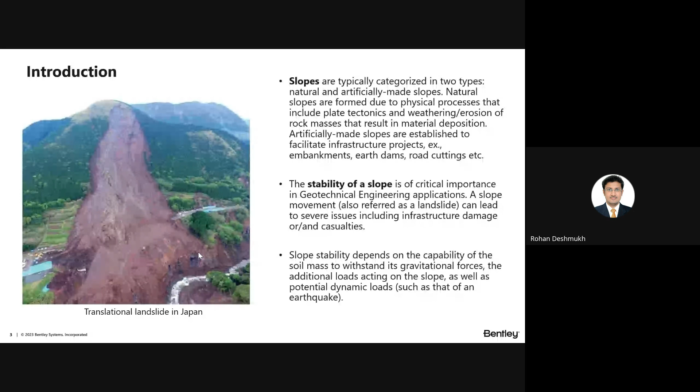Slope stability depends upon the capability of our slopes to withstand gravitational force, meaning its self-weight, the self-weight of the soil or rock material. In addition, sometimes external loads are also there at the top of slopes, maybe from some construction, which the slope must withstand. And in addition to that, sometimes earthquake or some dynamic load also comes into the picture. So the slope must withstand all these different forces: gravitational, external forces, and earthquake or dynamic loads. This is all about the introduction about slopes.

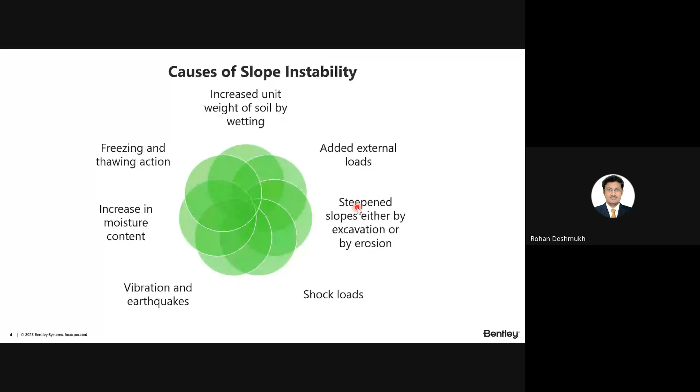Now, what are the different reasons or causes which lead to slope instability or slope failure? The very first and most common one is the increase in weight of the soil because of saturation, because of wetting - that is the main predominant reason behind many slope instabilities. Added external loads at the top of slopes may also cause slope instability. Sometimes steepening of slopes, either by excavation activity or because of erosion, is also one of the reasons. Shock loads, vibrations, and earthquakes - these dynamic loads also sometimes trigger slope instability. Increase in moisture content, and in some regions, freezing and thawing action is also responsible for causing slope instability.

Now I'll show you some typical modes of failure and types of slope failure, as suggested by Varnes in 1978. The very first type of slope failure, which happens mainly with rocky material, is falls, where you can observe simply downward movement of rocky material. You can see the rock material get detached from its parent rock, and in the case of falls, that movement is in a linear pattern. You can see this rock fall in figure 1A, and this is an actual example from Spain, that is the rock fall.

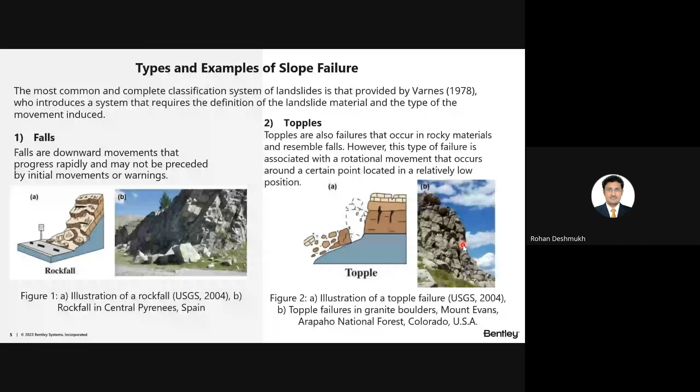Now coming to the second mode of failure, that is topples. It is similar to falls - our rocks get detached from their parent rock, but along with the linear motion, sometimes rotational motion is also there for the detached rock. You can see this is an example from Colorado, USA. That is about the topple kind of failure, where rocky material gets detached from its parent rock, and that detached material, along with translation motion, also has rotational motion.

Now regarding the slide, this is another mode of failure. It is mainly because when the applied shear stress is more than the shear strength of our soil or rock, and this leads to a shear failure.

This is an example from Japan, and the reason behind it is seismic activity; earthquake is responsible for this kind of slide or landslide failure. This is the case from the year 2016.

Further, you can see another mode of failure, the lateral spread, mainly because of liquefaction, and it happens in the case of saturated soils. Because of shaking or the earthquake, the shear strength gets completely lost for a saturated soil, and this kind of thing happens. You can see this lateral spread happened in Pakistan, causing complete damage to this road or highway.

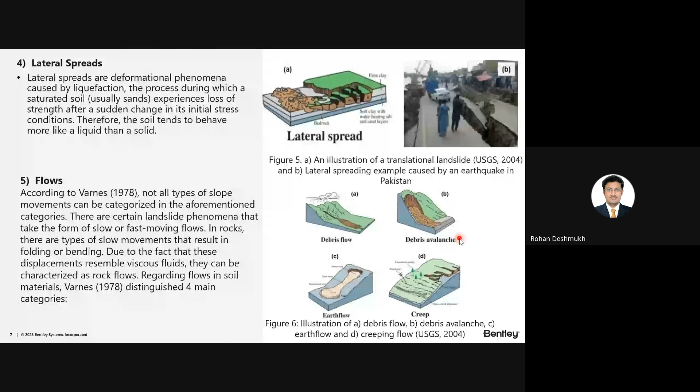Another mode of failure is the flows. The failures which we cannot categorize in the earlier four categories, we categorize them in the flow category. So what will the flow kind of failure be? Simply the soil material or rock material flows along an inclined path. You can see the debris flows or debris avalanche, these are a few examples of flow kind of failure.

Now we just discussed the different modes of failure, and now coming to India: there are a lot of examples where slopes get failed because of several reasons. These are a few news cutouts I have taken about the mishappenings or landslides which happened throughout India. This is the case from Kerala, from the year 2022, where this road completely got blocked because of this landslide.

This is another example from Kerala itself. You can see massive translational kind of sliding happening along this region; the whole soil material is completely washed out.

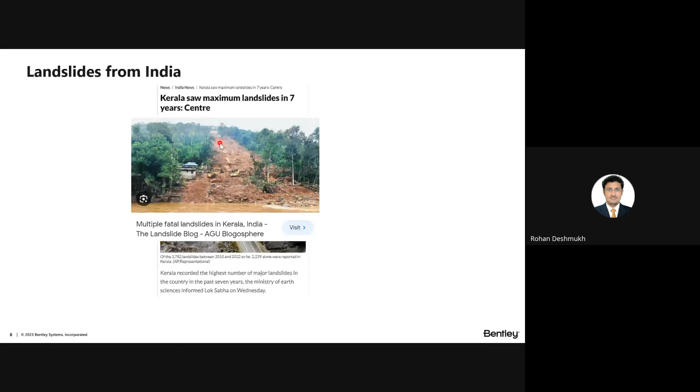This is another from the northern part of India, where almost 46 got killed because of this mishappening, this landslide. This is another photograph from the Himalayan region, over 50 killed again, and rain is the factor which triggered this kind of failure.

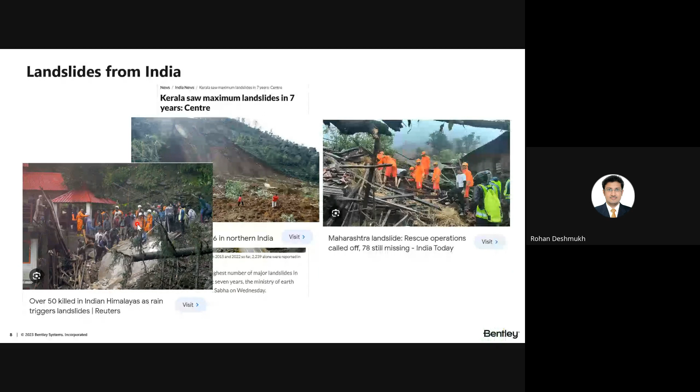This is another case from Maharashtra. This is another photograph from landslide damages; you can see that a portion of this road is completely washed out.

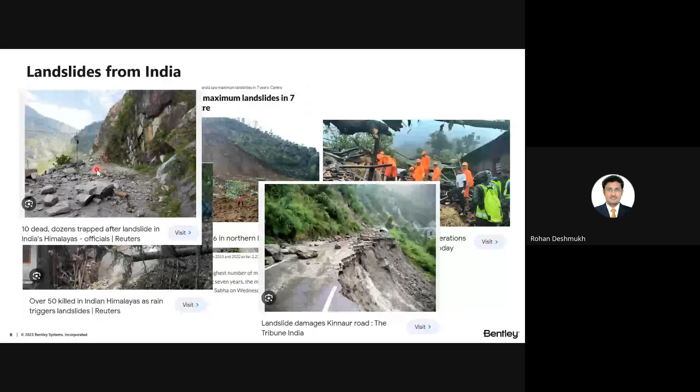This is another example, where you can see rock particles get detached from the parent rock and are now on the road surface. This is again an example from the Himalaya.

This is another case study, another news item from Maharashtra. You can see 12 killed in the landslide after heavy rain, and I guess this is the case from the Pune region.

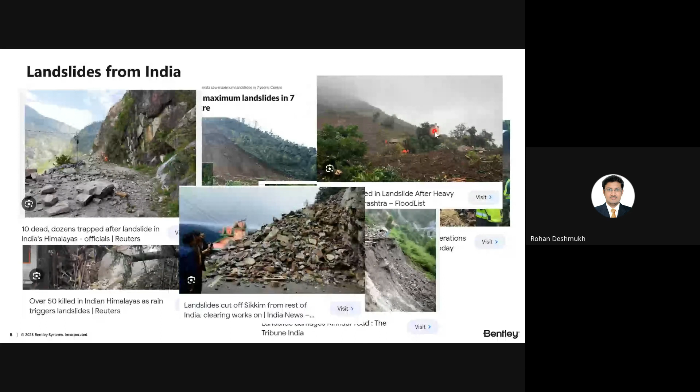This is the example from Sikkim. So many of this kind of landslide happen every year in India, not only in the Himalaya region, but in other parts of the country as well, like Kerala and Maharashtra.

So is there any guideline available? Are there any suggestive measures to avoid this kind of mishappening?

Recently, the Central Electricity Authority of India published one guideline, and in that they have clearly mentioned what we need to do to avoid this kind of mishappening. But this guideline is applicable only for hydropower projects, since it is given by the Central Electricity Authority of India. In their guideline, I just highlighted the portion which is important for this session; that is what they mention in this guideline.

Project authority should carry out numerical model studies of vulnerable slopes, meaning identifying where the critical slopes are, using either a limit equilibrium approach, or the finite element method, or the finite difference method, to find out the factor of safety for those vulnerable or critical slopes.

Excuse me sir, the screen is not visible. There are multiple screens that have been shared.

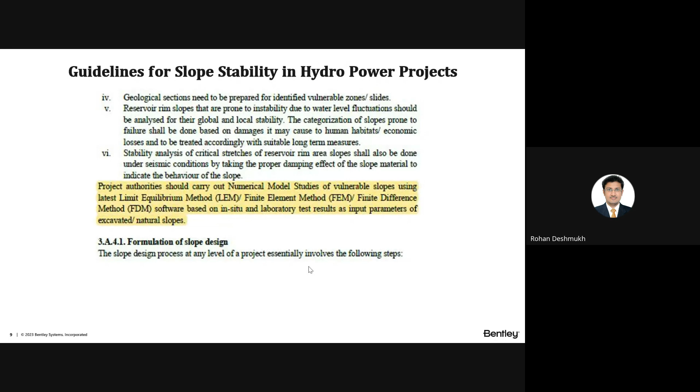These guidelines clearly indicate the role of software tools or different numerical techniques to find out the factor of safety for critical slopes. Of course, the input data is again important in this case. You need to carry out in-situ tests and some laboratory tests to give the proper input data.

So that we can get the appropriate factor of safety for our critical slopes. Now, coming to the main point of discussion, that is the methods of slope stability analysis. I distinguish the slope stability analysis methods into two: one is the limit equilibrium approach, and the second is the numerical method of analysis.

In the numerical method of analysis, there is a continuum modeling technique, discontinuum, and hybrid coupled modeling. In the limit equilibrium approach, which is very common for factor of safety determination for slopes, there are a lot of methods: the Swedish circle method, ordinary method of slices, modified Bishop's method, Lorimer's method, Spencer's method, and the Sarma method.

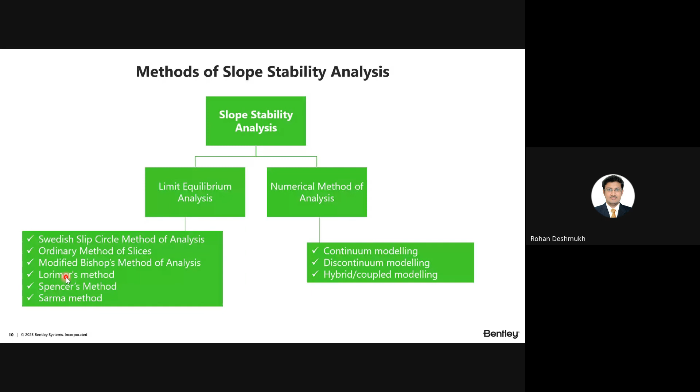Now I will see the limitations and advantages of each and every method. Coming to the limit equilibrium analysis, as I mentioned, it is the most common and widely used slope stability method. But there are a few assumptions behind this limit equilibrium analysis. Let's try to understand those.

This type of analysis is based on the assumption that the slope is on the verge of failure and that the forces acting on the potential failure surface are in equilibrium. This is the very fundamental assumption behind this limit equilibrium analysis.

There are a lot of different methods of slices, like the Fellenius method, Bishop, Spencer, and Morgenstern-Price methods, in which we divide our slopes into either vertical slices or sometimes horizontal slices. What we are doing in all these methods is trying to find out the horizontal forces, vertical forces, even the inter-slice forces for each and every slice, and finally we try to find out the factor of safety based on some equation.

We'll try to cover that equation in the upcoming slides. Another aspect of limit equilibrium analysis is that, of course, it is very fast. It is compatible with many geotechnical software tools and relatively very simple.

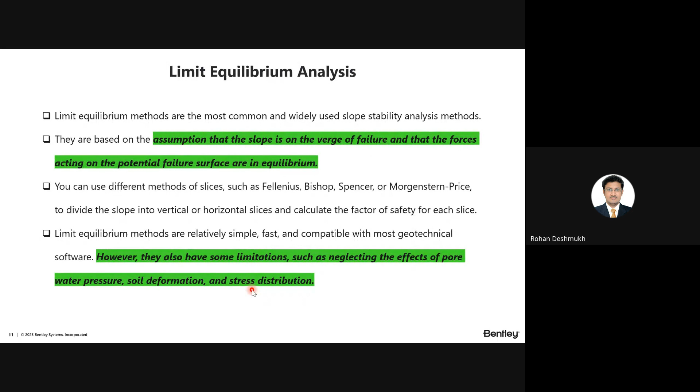But sometimes when we go with limit equilibrium analysis, it neglects the effect of pore water pressure - I'm saying in some cases, or with some software tools. It also neglects the soil deformation analysis and the stress distribution. These things get neglected in many geotechnical software tools when we use the limit equilibrium approach.

Now let's try to understand the different methods, the assumptions behind them, the equations that we use, and the probable slip surface we assume for every method. Of course, as we know, the slip surface or failure pattern is not completely circular, nor is it completely linear - it can be of any shape.

But for simplicity in analysis, these methods assume that the slip surface or failure surface may be circular or of some other shape, or some methods don't assume anything. The very first method, the ordinary method of slices, was published in 1936. The fundamental assumption in this method is that the resultant of side forces is parallel to the base of the slice, which is not true in every case.

Our resultant is not parallel to the base of every slice - it may be off horizontal, it may be little inclined. But they assume this to simplify their analysis. The equation used to get the factor of safety is the overall moment, so the horizontal forces and vertical forces are neglected in the ordinary method of slices. This is, I can say, the limitation of this very old method.

Then the assumption behind Bishop's method, published in 1955, is that the resultant of the side forces is horizontal - this is also not true in every case. The equation they use involves the overall moment and the vertical forces, so again the horizontal forces are missing from the equation. The slip pattern or failure pattern assumed in the Bishop method is again circular.

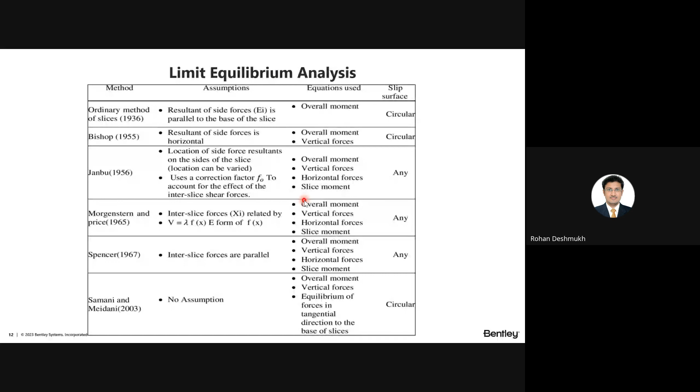That is again not true in the real scenario. Similarly, for Janbu, Morgenstern-Price, Spencer, and Sarma, I have mentioned their assumptions, the equations used, and the slip surface they assume in their analysis. So not every method is accurate from the field point of view, but of course, approximately, we get some values. Similarly, I have mentioned the assumptions for the other methods: Spencer, Morgenstern, Fredlund, Corps of Engineers, and Sarma.

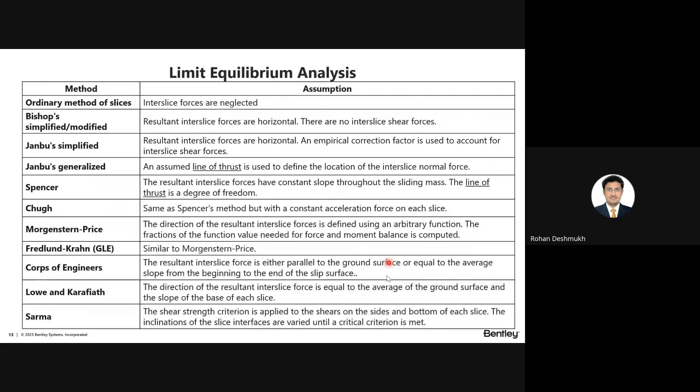Okay, so now I'm moving ahead because I need to cover a lot, the case study as well as the demonstration. Now coming to finite element analysis. This is a more advanced and sophisticated slope stability analysis method. Of course, it also has some limitations, which I'll cover in the upcoming slides. Finite element analysis uses equations of equilibrium and constitutive laws for the soil material. Constitutive laws means our regular Mohr-Coulomb material model is used to determine the factor of safety by solving these numerical equations of equilibrium.

Of course, the add-on in finite element analysis is that you can go with a plane strain approach, an axisymmetric approach, or a three-dimensional approach to create your slope geometry and boundary conditions. So I can say this is the add-on over the limit equilibrium approach. Of course, we can do many of these things with limit equilibrium too, like plane strain, axisymmetric, and 3D. Another advantage of finite element analysis is that we can consider the effect of pore water pressure in our analysis. We can also capture the soil deformations and the stress distribution in our slope area.

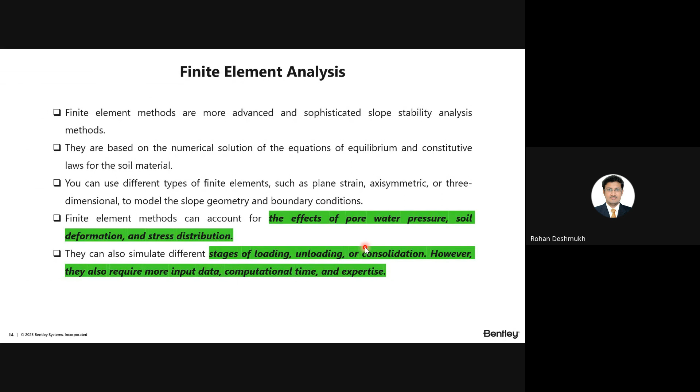Now, what is the mechanics or the mathematics behind finite element analysis? Let's try to understand that, because we just run the software and get the factor of safety, but many times people don't know how Plaxis or this software tool calculates the factor of safety for our slopes. So we use the phi-c reduction method in the finite element approach. What is this phi-c reduction method? The factor of safety equals the available soil strength divided by the mobilized soil strength. So what is the meaning of available and mobilized soil strength? Initially we give input to our soil or rock material in terms of the c and phi values, cohesion and angle of internal friction.

So what is the software doing? It applies some out-of-balance force. It means we are actually applying some shear strain on our structure and trying to make it fail. During that process, the software continuously decreases the shear strength, the c and phi values, and checks where it fails against that applied shear stress. That reduced value, at the bottom, is the mobilized soil strength, and the input data at the top is the available soil strength. We take the ratio of the two to calculate the factor of safety. So the summation of Msf is nothing but the factor of safety that we calculate.

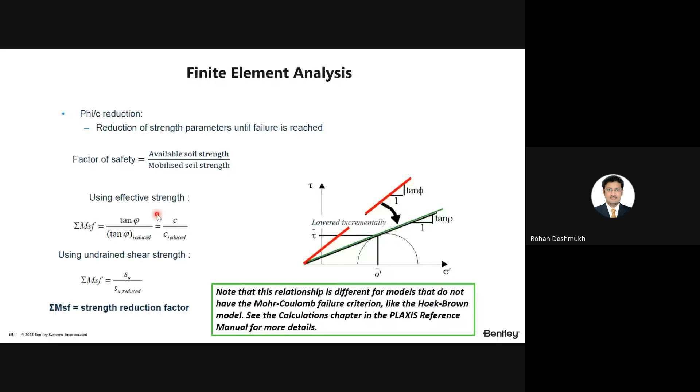Now coming toward some limitations, I'm not saying limitations, but when you carry out a safety analysis with Plaxis or any other software, you notice for that safety calculation very huge deformation. You can see for this particular example, the dimension is 0 to 12 meters, till here it is 28 meters, and this is 40 meters. So the total extreme boundary is from 0 to 40 meters only. But still, the deformation we reach in the safety analysis is 35.2 × 10^-3 meters. So very huge deformation.

So basically, this kind of deformation in the safety analysis does not have any physical meaning. Then where does this value come from? That information I have mentioned over here. As I mentioned, in the phi-c reduction method, we are introducing an out of balance force in our model. This out of balance force is solved by the calculation kernel, which results in the deformation that you are able to see over here.

And this additional displacement that is generated does not have any physical meaning. What is the software doing when we are running the safety analysis? The software is applying some shear stresses, out of balance forces, and it's trying to make this slope fail. How much deformation occurs until it reaches that failure is shown here, but it does not have any physical meaning.

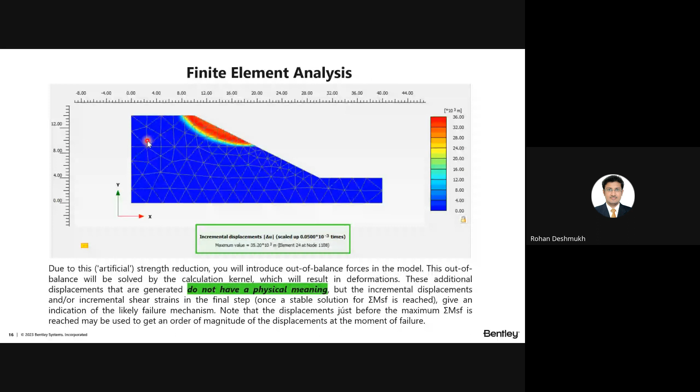Second, the failure occurs naturally through the zone within the soil mass in which the soil shear strength is unable to sustain the applied shear stress, which I mentioned in the last slide. We are applying some out of balance force. It means we are introducing shear stresses inside our material model, and the failure develops through a zone of weakness where your shear strength is low. Through that, this failure pattern gets developed.

Third, the slices. Since there is no concept of slices in the FE approach, there is no need for assumptions about slice forces. In finite element analysis, we are not dividing our slopes into horizontal or vertical slices, so inter-slice forces are completely avoided. The fourth advantage is that the FEM preserves global equilibrium until failure is reached.

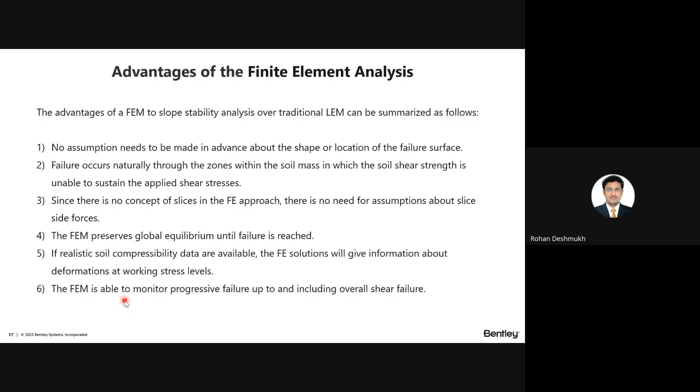The fifth advantage: if realistic soil compressibility data are available, meaning your Poisson's ratio, density, modulus of elasticity, the FE solution will give information about the deformation at working stress levels. So you are also able to get displacement values if you have precise compressibility data. And the last one, the FEM is able to monitor progressive failure up to and including overall shear failure. These are a few advantages over LEM.

But as I mentioned, some limitations are also there for the finite element method. For the determination of the factor of safety in finite element analysis, we are using the strength reduction method, that is, the phi-c reduction method.

Of course, it is a very powerful technique to get the critical slip surface or critical failure surface. But many of the times, our point of interest is not just a critical surface. We need a factor of safety at some other locations apart from a critical failure zone. So, however, there are some circumstances, some situations in which more information is required than just the most critical slip surface, or when the critical slip surface is of minor importance.

So, what are those circumstances? What are those situations where, apart from the critical slip surface, we need to see the factor of safety at some other locations? So, I just summarized a few situations where apart from the critical or the global factor of safety, we need some factor of safety for the other locations. So first example, for a large dam, both global stability as well as the stability of slope section in between the berms must be determined.

Okay, so I'll try to cover with this image. So you can see in this figure, this is the upstream side of my dam, and this is the berm that we have given over here, and this is the downstream face you can see over here. So with Plaxis or with the finite element approach, we are able to get only this kind of a critical surface, a critical failure surface over here. But if my point of interest is this location, then I'm not able to get the factor of safety for this location. That is the limitation of finite element analysis.

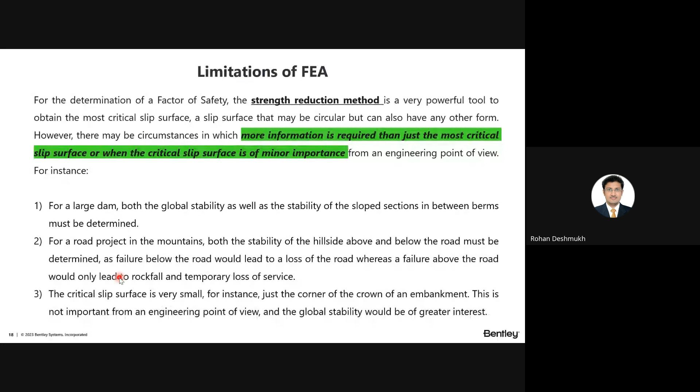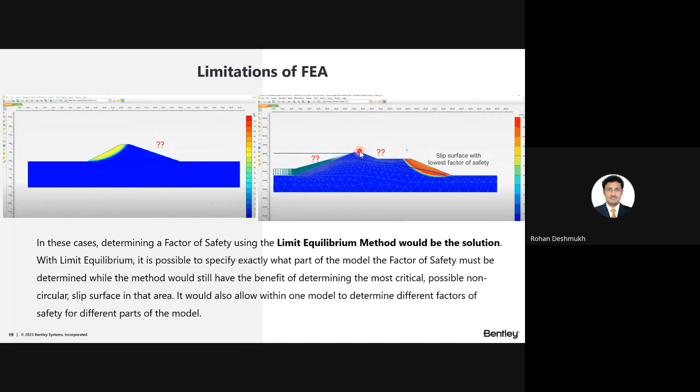So these are a few instances where our finite element approach has some limitations, because we are able to get only the critical failure surface with the finite element analysis. So in such a situation, you need to go with the limit equilibrium approach, because in limit equilibrium you are able to set where you want to find out the factor of safety. You can just set this portion. If your interest is this portion only, just set it as an input parameter, give the entry and exit point in the software. You will get the factor of safety for this region only. So that flexibility we have in the case of limit equilibrium software or the limit equilibrium approach.

So I'm just concluding the theoretical part that we have discussed till now. Still the actual demonstration and the case study remain, so just be with me. As I mentioned, in the case of the finite element approach, the factor of safety emerges naturally without the user having to commit to a particular form of failure mechanism. So in the finite element approach, we did not give the prior failure pattern, whether it's circular or linear. That prior failure pattern we did not need to give in the case of finite element.

Further, there is no need to specify a range of trial surfaces. In the case of limit equilibrium software, we need to give the ranges of trial surfaces, 1,000, 100, like that. So that thing is not there with the finite element approach. And also, there is no concept of slicing in the FE approach, which we discussed. So the assumptions about the slice forces, we are neglecting that part in the FE approach. So that is the good thing with FE analysis.

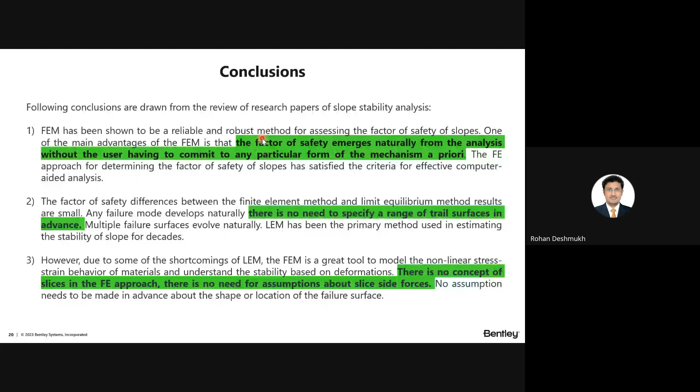Now I'm moving to one simple Plaxis example, which gives you more idea of how the factor of safety changes when we go with the finite element approach and when we go with the limit equilibrium approach. So I'll just try to show you that difference. I have already made this example. I have already run this problem. But just for your understanding, I'll show you the properties of the soil that I have taken.

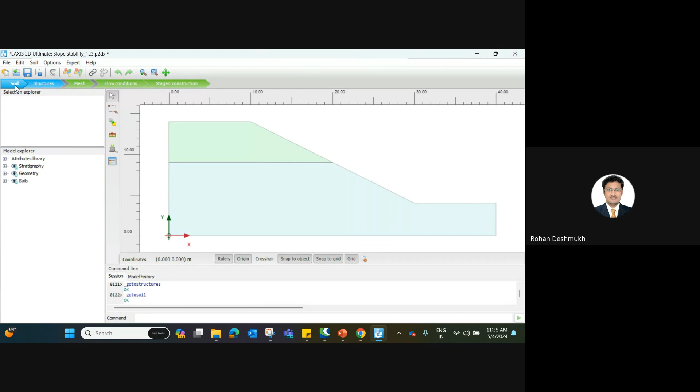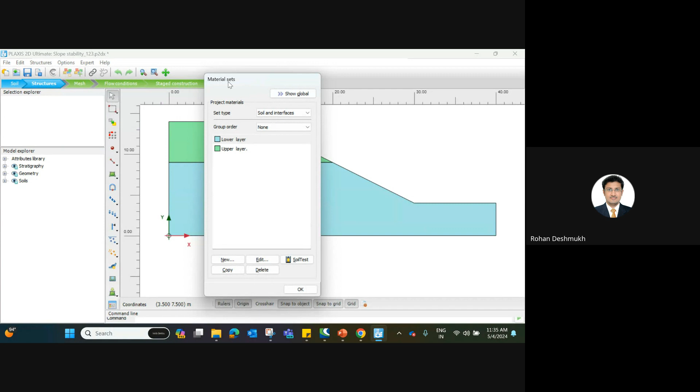So here, for simplicity of understanding, I have taken a very simple example of a slope. I have considered two soil layers, and I've named them the lower layer and the upper layer. For your understanding, I'll show you the properties for one layer, the lower layer. The unit weight values are 17 and 18 kilonewton per meter cube. The material model that I have used is the Mohr-Coulomb model, so the phi-c reduction method is applicable in this case.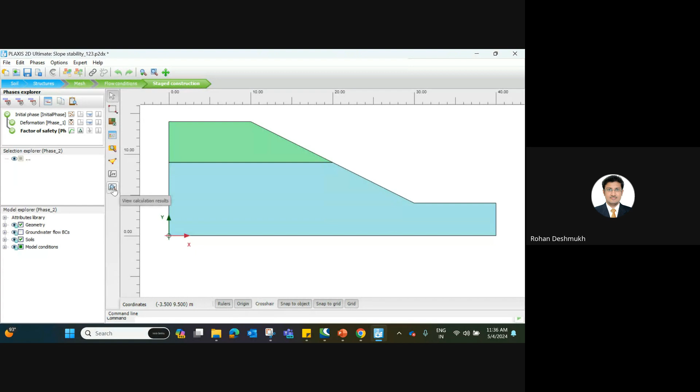So now I'm moving toward the output, to see how much factor of safety there is for this kind of slope geometry. I hope you are able to see the output. I'm showing you the deformation, how the failure develops. Going to the total displacement, you can see the failure will happen like this. But if you see the displacement values, they are almost 800 meters. As I mentioned, this has no physical meaning because right now we are checking the safety analysis.

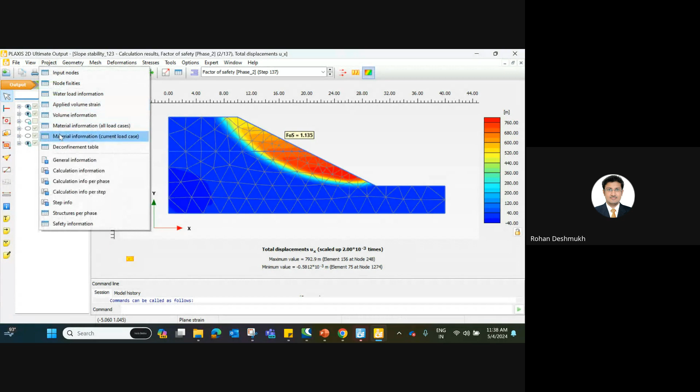But when I shift to the deformation phase from this drop-down menu, you can see the deformation is just 1.16 × 10^-3, meaning 1.16 mm. Again, I'm shifting toward the horizontal displacement; these are the horizontal displacement values. But the main point of discussion is the factor of safety value. To see it, go to Project and then Calculation information. Our target is to see ΣMsf, that is the factor of safety, and it is 1.135. Just give me a second.

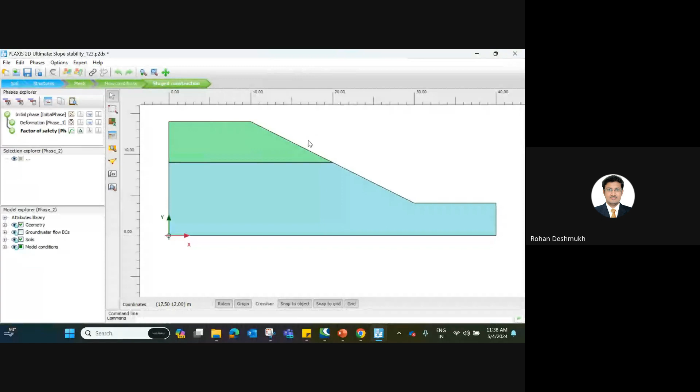The factor of safety here is 1.135. This is the finite element approach we have adopted to get the factor of safety. Now I'm going to solve the same problem with the same input data and same geometry using the limit equilibrium approach, with the Morgenstern-Price method, and let's see what factor of safety we get. With the finite element method, we got a factor of safety of 1.135.

Now let's try to solve the same problem. I'm exporting this file into the GeoStudio software, where we'll adopt a limit equilibrium approach, the Morgenstern-Price method, to solve the same problem. It will take some time to import this file into GeoStudio. Just give me a moment.

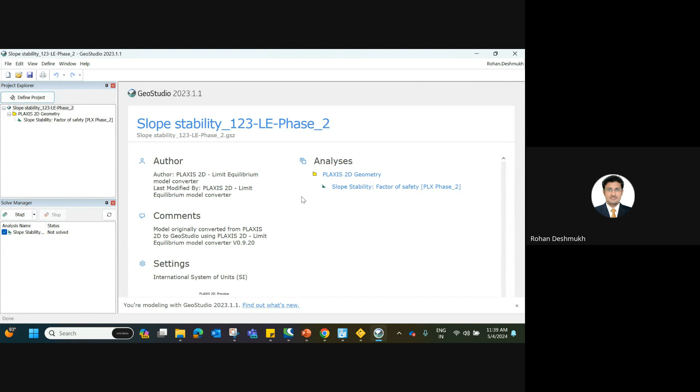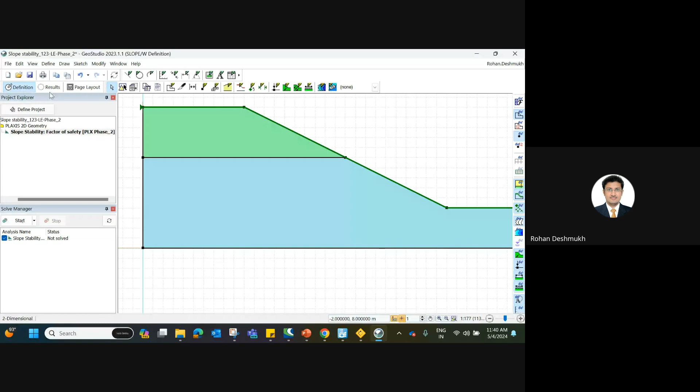So now we have imported our geometry from Plaxis to GeoStudio. You can see the upper layer, the lower layer and the other things. I'll quickly show you the method of analysis we are choosing for this problem: the Morgenstern-Price method. For the slip surface, I'm assuming the direction of movement is from left to right, and I'm using entry and exit points. So now I'm giving the entry and exit points.

That is the input that we need to give in the software. So I'm suggesting this range for an entry point. I'm suggesting approximately this range for an exit point. Okay, now I'm just clicking on the start button to solve this problem. It will take some time to get the output. Yeah, now it runs perfectly.

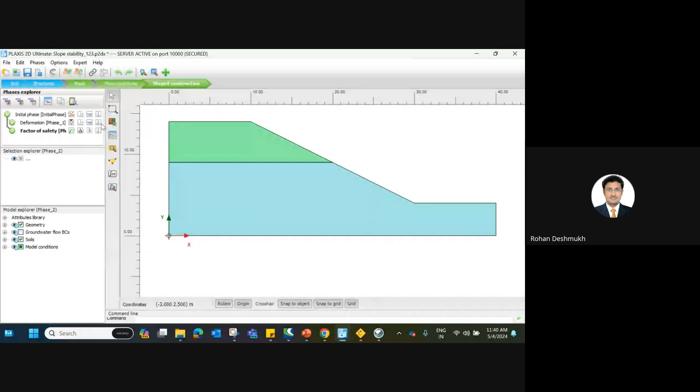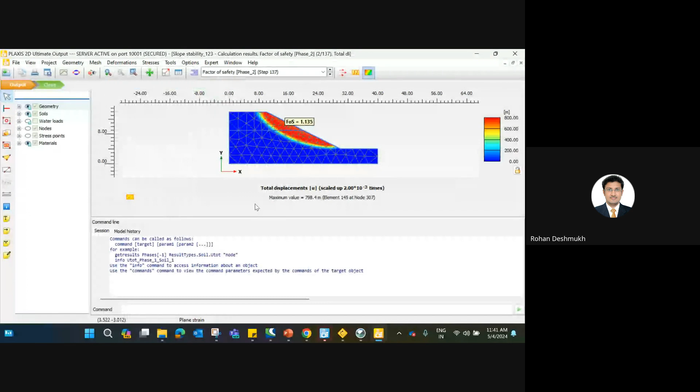So this is the failure pattern. And in the factor of safety, you can see the factor of safety is 1.135. And in GeoStudio with the Morgenstern-Price method, we got the factor of safety 1.16. But again, it may be because the model is quite simple. That's why we get nearly similar results.

But if the geometry changes, even if our entry and exit point locations change, this factor of safety changes accordingly. But I just wanted to show you that there's not much difference if your geometry and the material input data are more or less the same.

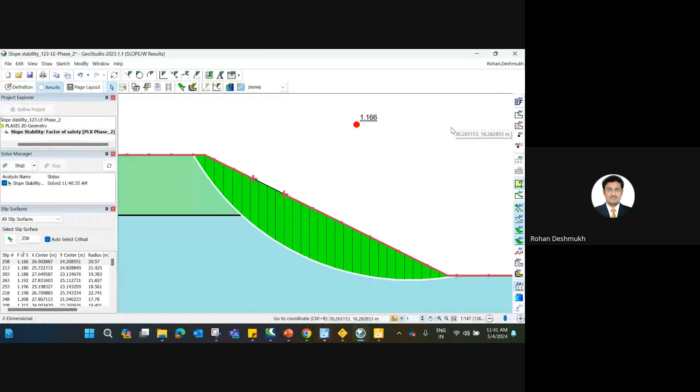Okay, though there are a lot of assumptions behind the limit equilibrium approach, we are still getting approximately the same result. Okay, but of course there is a lot of information. If you are changing things here and there, you will get a difference in the result. Okay, that's about this problem.

Now I'll go toward one simple case study from New Zealand, which is a road construction project. So I'll just quickly show you the problem. This problem has already been run. So I'll just quickly discuss the geometry, the soil layers and the sequence of construction.

So you can see this is the top layer of the slope, and this is the bottom layer of soil. And the target is to construct a road at this location. Okay, so the road width is of course going beyond the top layer of soil. So we need to refill this portion to accommodate the total width of the road. So for that purpose, first of all we excavated this portion of the soil.

Okay, and then I added one more phase to create a fill at this location to accommodate the total width of the road. And then in the next phase, I constructed a road; I have used a plate element over here. Okay, and then after constructing the road surface, I applied the traffic load. You can see that the load is now activated in another phase.

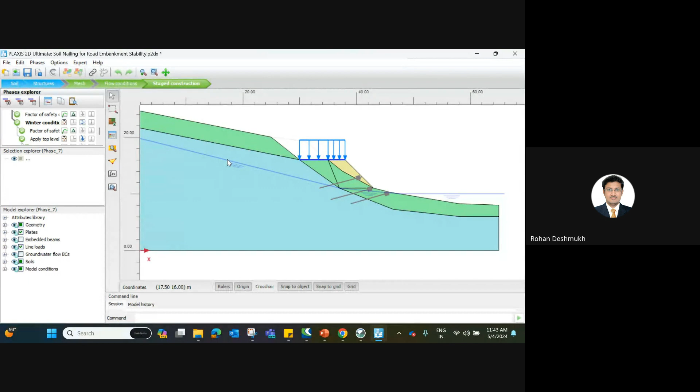After constructing the road and applying the traffic load, I conducted the safety analysis, factor of safety, for this portion. And again, I consider a very extreme condition. Now you can see that in this phase, the water level is somewhere here. And in another case, I simply raised this water level. So I'm simulating the rainfall condition or saturated soil condition, and wanted to check how much the factor of safety gets reduced because of this increase in water level.

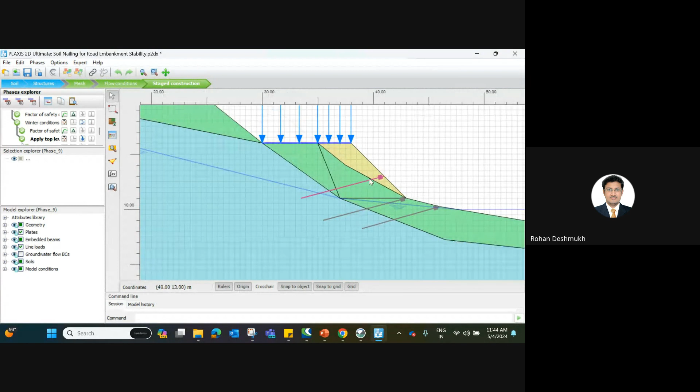So after this increase in water level, I again ran the factor of safety analysis. And after they found that the factor of safety is not as per the requirement, they provided a soil nail. You can see that after running this factor of safety, I am going to the top soil nail phase, where we just activated this single soil nail in this failure pattern.

And then again, we check the factor of safety. We need to check how much the factor of safety gets improved with one single soil nail activation. And after that, we also activated the remaining 2 soil nails over here. So now let's come to the output.

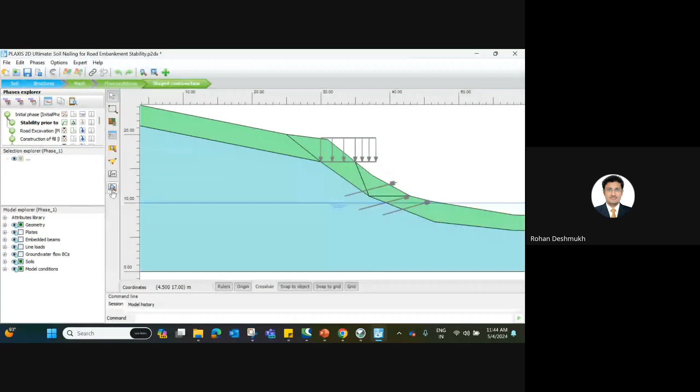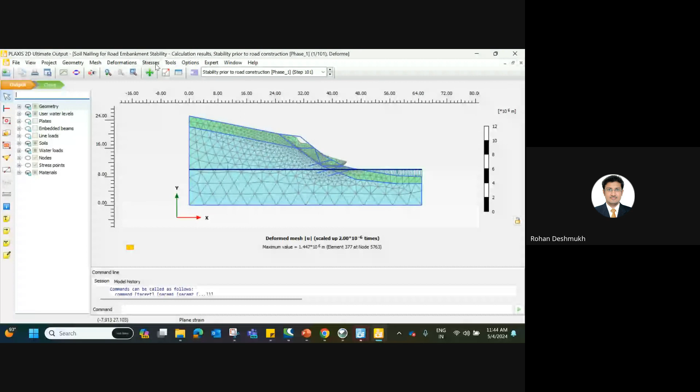Now I'm showing you the output for our natural slope, no excavation, no construction, no soil nailing: how much factor of safety was there before the construction. So I ran that analysis as well. I'll just quickly show you the factor of safety for that one. I'll show you the total displacement. So the failure pattern is likely to be this one. And again, when you're checking the factor of safety phase, don't panic when you see this kind of deformation.

They are not having any physical meaning.

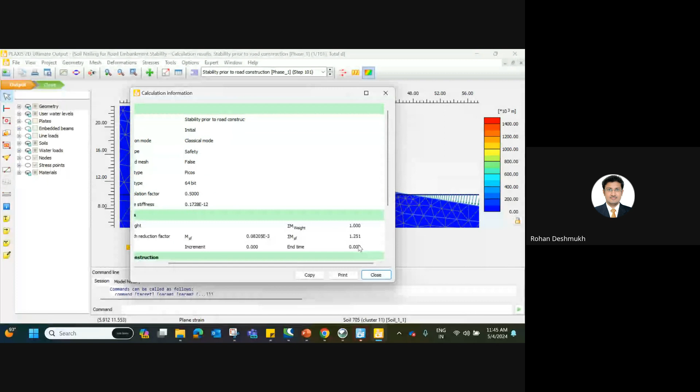Now coming toward the factor of safety, I'm again going toward the project and checking the calculation information. So how much factor of safety is there for the natural slope? For natural condition, the factor of safety is 1.25.

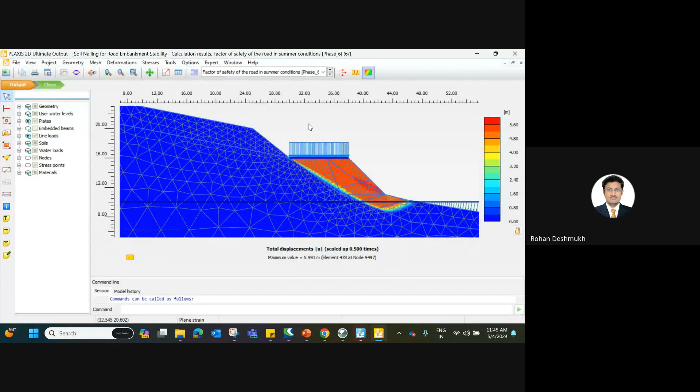Now I'm moving toward another phase. I run another factor of safety analysis after the whole construction of the road and filling of the extra soil, applying the traffic load. Let's see how much factor of safety is there after constructing the road. Going toward the project and calculation information, this time you can see the factor of safety is 1.48.

Now there may be a question in your mind: prior to road construction, the factor of safety was 1.25, and after road construction why did it improve to 1.48? That is mainly because we are constructing this reinforced fill over here, this improved property soil layer to accommodate the road width, and because of that the factor of safety increased a bit due to this good quality fill soil. But still, the factor of safety is 1.48, not more than 1.5.

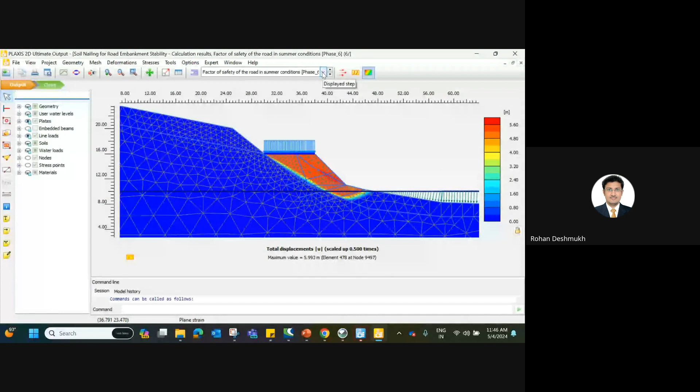So that's why they applied a single soil nail. But prior to that, I wanted to show you the effect of water on the factor of safety analysis. Till now the water level is at this location.

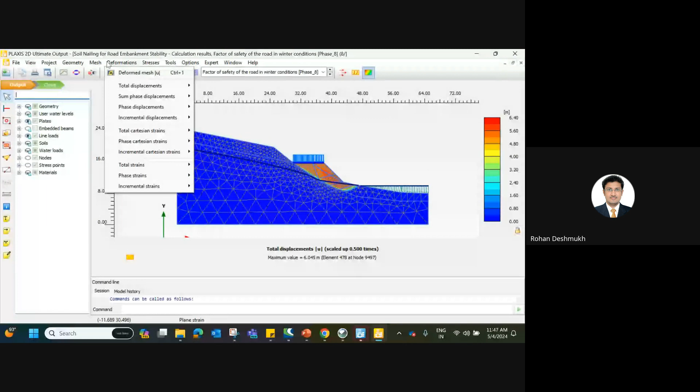Now I'm shifting this water level a little upward, like this. Let's check how much factor of safety is there when the water level increases, meaning we are simulating the rainfall effect, or you can say the saturation effect. Let's take the factor of safety for this case again, going to the calculation information.

You can see that the factor of safety now reduced to 1.42. Before increasing the water level, the factor of safety was 1.48. Now it drops to 1.42 because of the increase in water level, or you can say the pore water pressure effect comes into the picture.

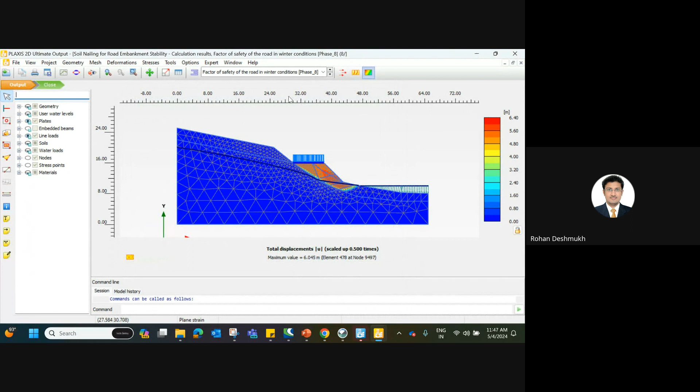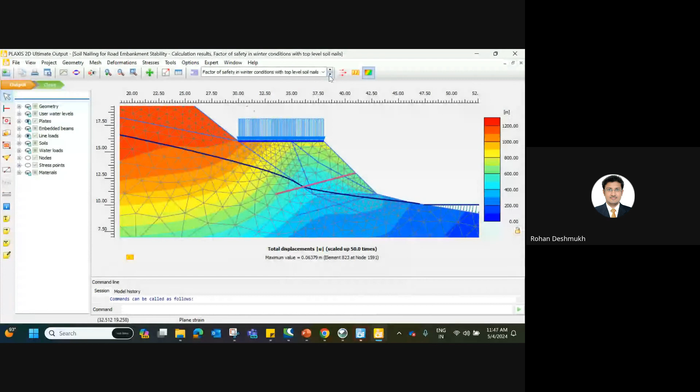Now let's see how much the factor of safety improves when we apply one top soil nail at this location. I run the factor of safety analysis just after that. You can see that the failure pattern now shifts from this side to the top side. Now, whatever factor of safety we check in this phase is for this critical top slope, not for the bottom side of my road.

Let's check - I'm going to the project calculation information. The factor of safety for this top portion is now 1.75. So this is the limitation of this finite element analysis, that we are not able to check the factor of safety for this region.

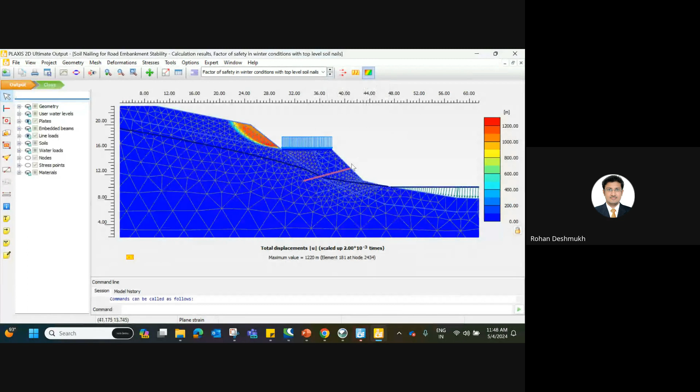With one single soil nail, the factor of safety reaches 1.75, and we have added two more soil nails over here. But I haven't run the factor of safety analysis after adding those two more soil nails yet.

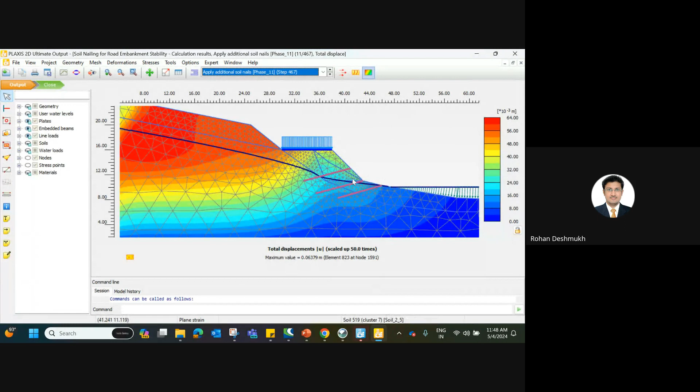So this is the failure pattern. I'll just show you the one with a single soil nail. You can see this may be the probable failure surface for the top zone, and the bottom portion gets secured because of this one single soil nail. But prior to adding that soil nail, if we check the failure pattern, it was lying somewhere here. Because of the addition of one single soil nail, this failure pattern shifts from here to the top area.

The inclination of the soil nail and its length are determined after doing many trials and errors, and then they fix the angle of the soil nail and its properties - diameter, length, and other input parameters. So that's all from my end.

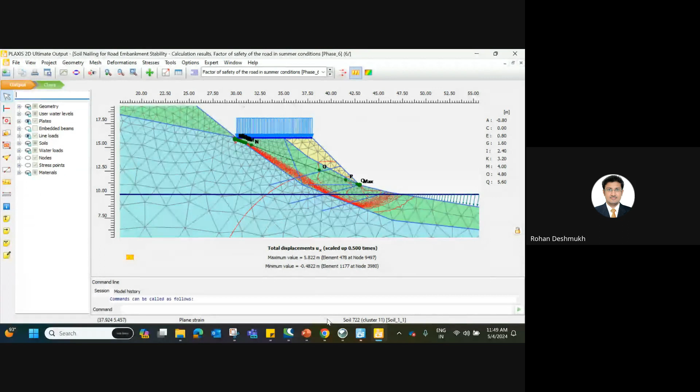First of all, thank you, Dr. Deshmukh. That was a very beautiful lecture. You started from the very basics, because we have so many students joining us, and they always want that when a speaker comes in, they should always start with the basics. I think you explained it very well, how the modeling is taking place and what are the parameters, how they should be kept in place.

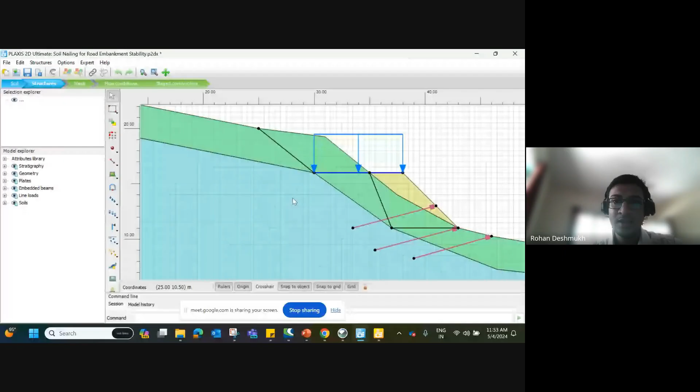Coming towards the structure, and you're asking about this plate element's property -- of course we need to give the axial stiffness and flexural stiffness for that. I'm going to the plate and the road surface, and into edit, and you can see these are the EA and EI values used in their analysis. In that case, you can simply take the modulus of elasticity as per your bituminous material or pavement material, and multiply it with its cross-sectional area and moment of inertia, so that you can simulate your road surface with the plate element as well.

Or, if you do not want to go with this approach, simply make a layer of your pavement thickness, give the property of E as per your pavement material, whatever it is, and go for the further analysis. I hope I clarified your doubt. Right, sir, I think so, that would have been clarified.

There's another question from Pandey ji: Can we use Python-based codes to generate slope models in Plaxis if there are a number of problems to solve? Yes, of course. Plaxis supports Python scripting, so that feature is available. You need to generate your code first, and just change the parametric values, like the c-phi parameter or the geometric parameter, whatever you want to change, and run your Python code.

So the answer is yes, you can perform Python-based scripting, and you can perform your slope models.

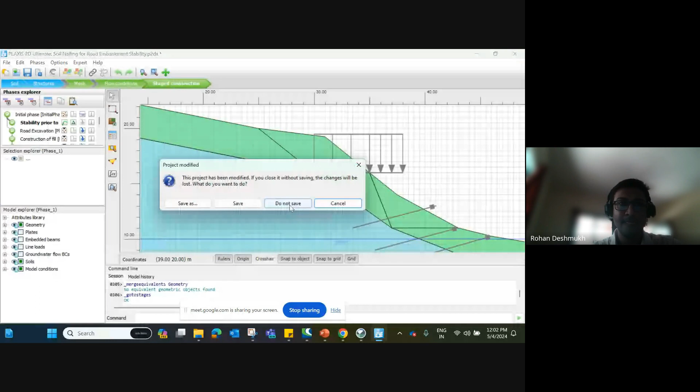For that, I already performed two different analyses for that project, where I first ran the deformation phase. So I ran two different phases: one is the deformation phase, and the second is the safety phase. In the deformation phase, whatever result we obtain is your deformation value only.

I hope my screen is visible. You can see that this is the deformation phase I have run, and this is the factor of safety phase I have run. If I click on deformation, and for detail if you want to see, I'm going into edit, and you can see the calculation type I have selected is plastic, meaning the deformation or stress-strain type of calculation only.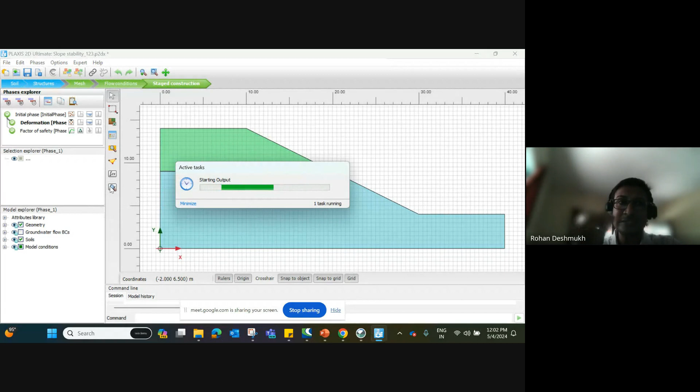So the output of this phase is nothing but the deformation. You need to run a separate phase to check the deformation in the horizontal and vertical direction. If I go over here, you can see the deformation value is almost 1.16 mm for this case. So you need to run a separate phase to see the deformation values. Right, right, right, thank you sir.

There is another question from Pankaj Bariker ji. Sir, can you please demonstrate how we can develop the PY curve in Plaxis? I need to conduct another separate session for this one, because I need to model an actual pile and run the model, and then select nodes at every point so that we can develop a curve for that.

Definitely, I think when we'll be organizing the next part of this series, we'll definitely be calling you, sir, again, and we'll be doing some more demonstrations on finite element analysis.

That is quite interesting. Even we, being in Himachal Pradesh, are regularly witnessing such problems of slope stability. I think that will be beneficial for us as well. Sir, adding to that, I just wanted to know: many times when we are interested in rainfall-induced landslide problems, especially when we have to design retaining walls at failure slopes, the water table is actually very deep. If someone still wants to incorporate the effect of the water table, what can be done?

But the level of the water still needs to be decided. Is it okay to keep the water level somewhere at the slip surface? Yes, it should be, and just make it till the top level if possible, if saturated soil is there. So just increase that level. So again, we need to do a lot of trial and error. Where should we set the top water level? Again, you need to do the trial and error process to find the lowest factor of safety for our slopes. Right.

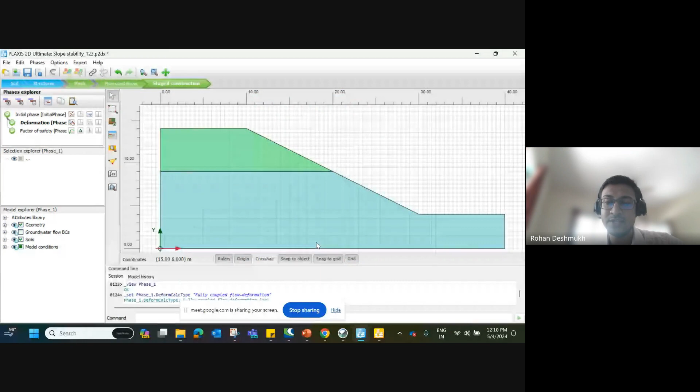Yeah. Okay, so in this calculation tab, you can see the fully coupled flow deformation type of analysis is there. So for your particular phase, you need to select that one and then run the analysis. That kind of calculation is there in Plaxis. Right.

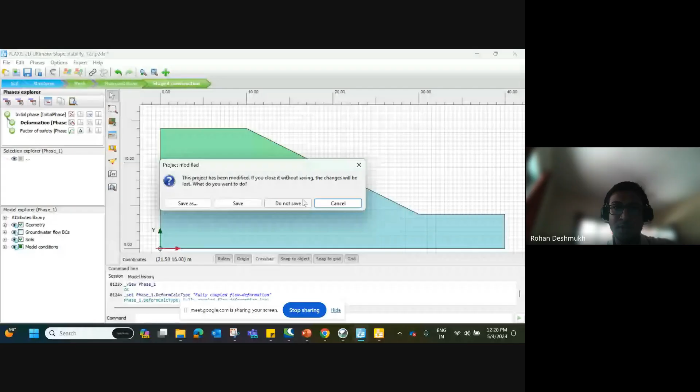Hello, sir. Sir, when we define the safety analysis, will it be performed only for the phase defined just before it, or for all the phases defined before the safety phase? Okay, so the safety analysis you're running applies to the phase just prior to it. For example, I'm sharing my screen to give you a clear idea, switching to another problem. In that project, we ran the factor of safety analysis at different stages, meaning prior to the road construction, then after the road construction. So I'll just.

Okay, so you can see after the initial phase, I run the stability prior to road construction, means before excavation and everything. So this factor of safety that we obtain in this second phase is for this initial phase only, means for this geometry only.

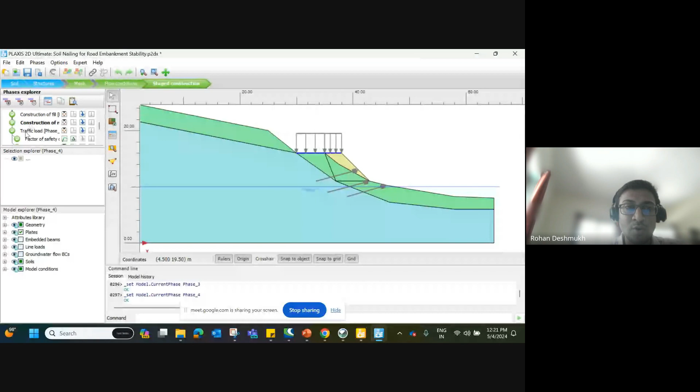Similarly, if I come to this factor of safety, which we run after the traffic load application, this factor of safety is just after the traffic load construction, but it also considers the effect of all these phases which we considered earlier, means the road excavation, then the construction of fill, then the construction of road, traffic load, and then we run the factor of safety. So in short, this factor of safety considers the effect of all these prior conditions.

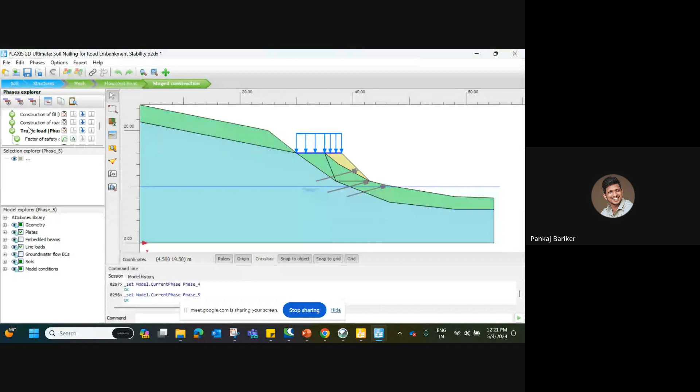Okay. Okay, sir. And one more, it's not a question, sir. Yeah, please tell. Yes, sir. There is also an option of reset small displacements or small strain. So will that have an influence on calculating the factor of safety in the stability analysis?

Yes, so I'll suggest don't touch anything in the deformation control parameters when you're dealing with the factor of safety analysis. That is my suggestion. Just select the calculation type safety and run the analysis. Don't change any default parameters in this reset displacement to 0, reset small strain to 0. When you need to use this one, for example, this is the initial phase, and when you are shifting from initial to the first road excavation, in this case I'm considering this reset displacement to 0, reset small strain to 0.

So what is the meaning of this? I'm simply ignoring the deformation which happens in the initial phase condition. In the initial phase, we are simulating the gravity loading, means self stress, self weight. The deformation because of the self weight. Of course, because of the self weight, some deformation is there in the soil. That may be 1 mm, 2 mm, 100 mm, whatever it is.

But in the road excavation phase, my intention is to see the deformation because of the road excavation only. If I'm not selecting this reset displacement to 0, whatever deformation I obtain in this phase is the accumulation of the deformation in the initial phase because of the self weight, the gravity loading, plus because of the excavation. So my intention is to see the deformation because of the road excavation, that's why I'm considering the reset displacement to 0 here. And in the case of factor of safety, you do not need to do anything with these parameters when you're doing the safety analysis.